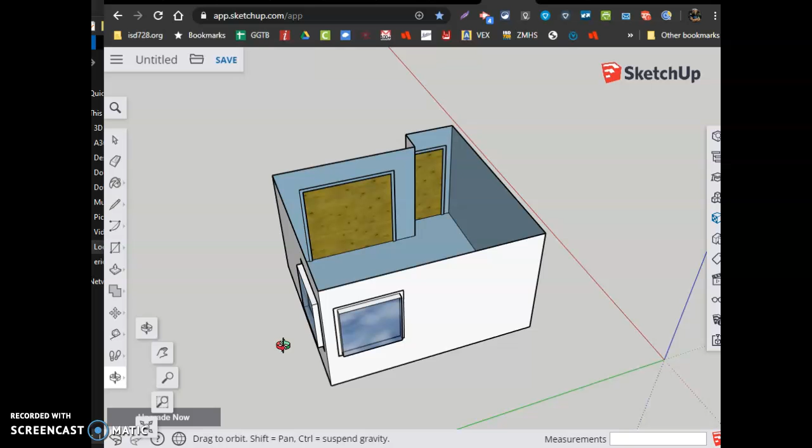All right, now for the exterior of this little room, we're gonna learn how to draw some of the wall framing for our build. Chances are, if you peel off the paneling on your wall called sheetrock, you'd see some framing members, like the picture here shows.

You have one that runs along the bottom of the wall, a couple of top ones, some vertical ones. This is called a bottom plate. Then goes a top plate, and above it's called a cap plate. So bottom plate, top plate, cap plate. The vertical ones that run from plate to plate are called wall studs. Those that are on the left and right side of a window or a door are called trimmer studs.

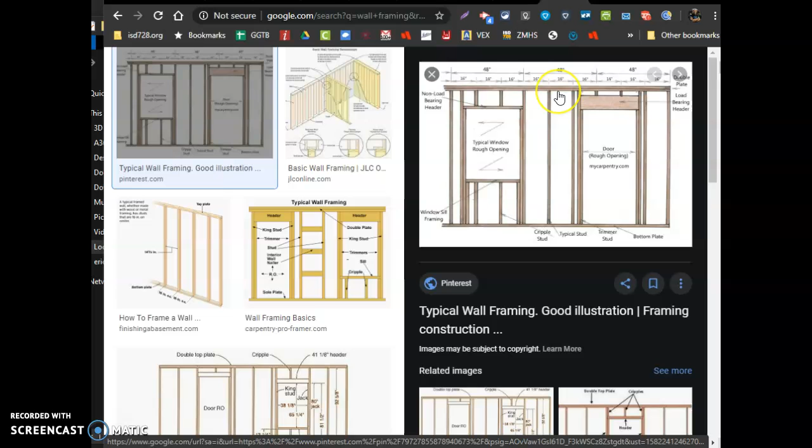And above the door or window, we're calling those the headers. Here's a window header, here's a door header. So we're going to build this bottom plate and the top plate. The cap plate we're going to leave off for now. So top plate and bottom plate.

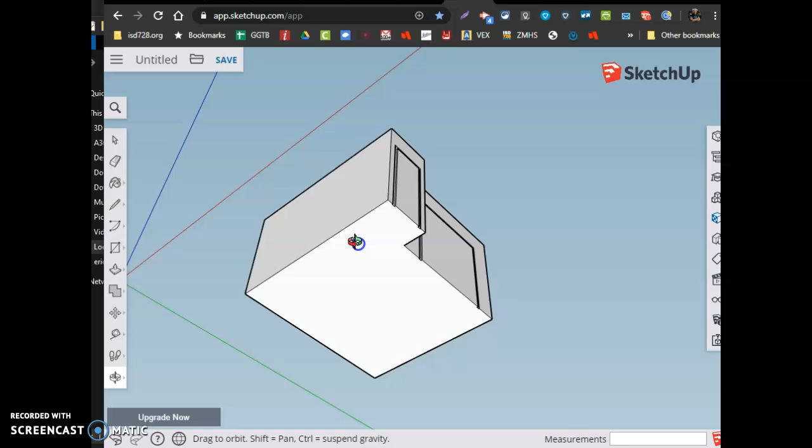We're going to build ours with a 2x6 construction, meaning it's a 2-inch by 6-inch piece of lumber. But that's before it goes through the drying process at, say, a sawmill. Will it work? We'll find out.

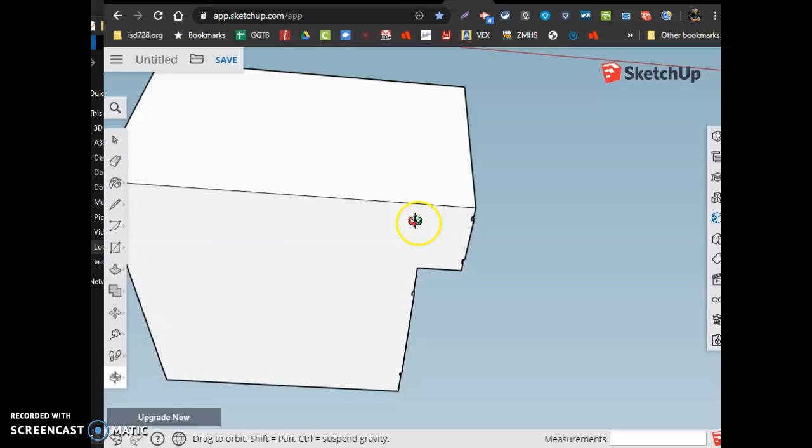So I want to first fix here. See the bottom of my house, little divots here? I want to fix those. Can I? Think. Should be able to, because what we want to do is offset the bottom of this house room. If I go to the offset tool, click and drag. Oops, didn't work. Try it again. Click and drag out.

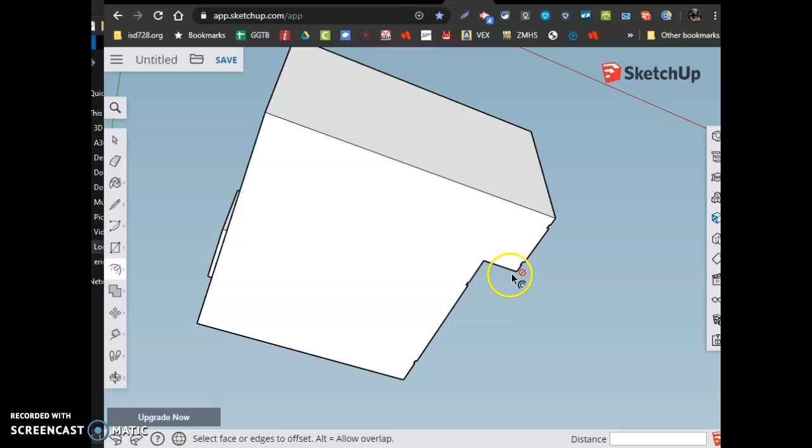See my little divots I have there by the door in my closet? That might haunt me. So if you have that too in yours, you gotta fix those. How we're gonna fix them is we're gonna draw a line all the way. Can't. Wait, there it is. Green. Think. I'm just gonna leave that. That should be okay.

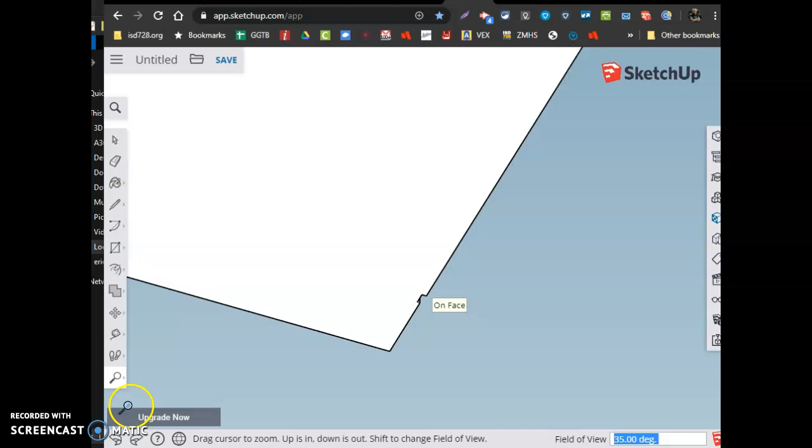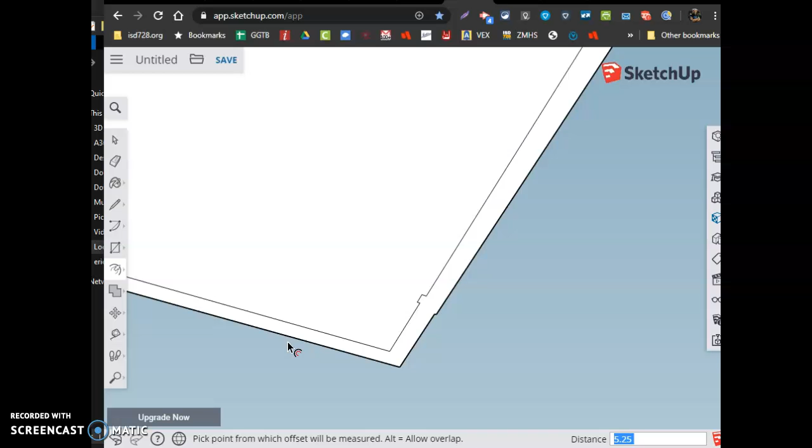So I'm gonna offset the surface, click drag outward. A 2x6 isn't really 2x6, but at the sawmill it is. By the time it gets dried and cleaned up, it's down to 1.5 inches by 5 1/4, 5.25. That's going to be the width of our bottom plate. It's going to be 1.5 inches tall. So offset, nope, push pull up 1.5 inches.

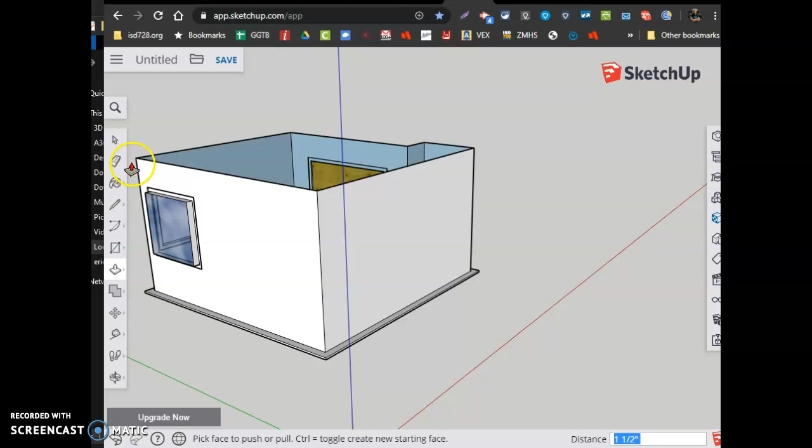There's our bottom plate. Now for our top plate, we need to bring that ceiling back. Got rid of it a few steps ago. Let's bring it back in. I'm going to draw a line from corner of my room to corner of my room. Ceiling comes back, line gets removed.

If I leave that line, what happens? Watch here. I'm going to offset. I have 2 chunks, that's not going to work. You remove this. Now watch. That same click, drag, drop. That same 5 1/4, 5.25.

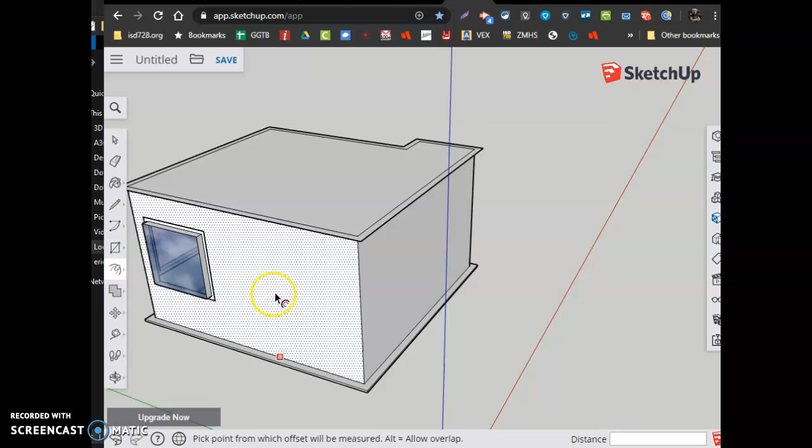And I need to bring this chunk down that 1.5 inches. Oops, hold on. I'll do that again. Shoot. Redo. Got it, 1.5. So there we have the top plate and bottom plate.